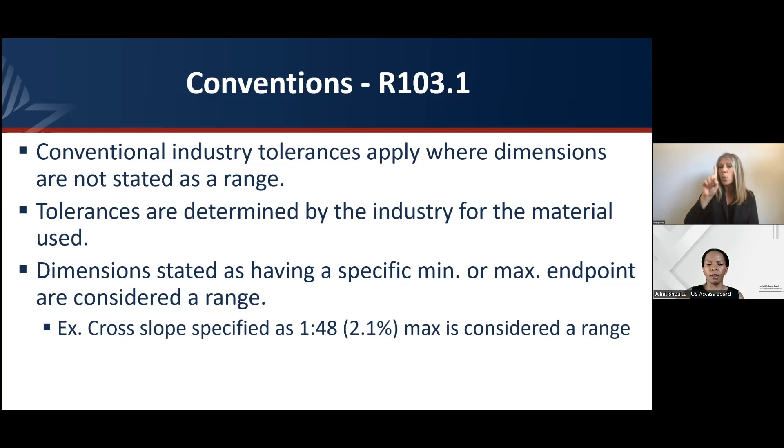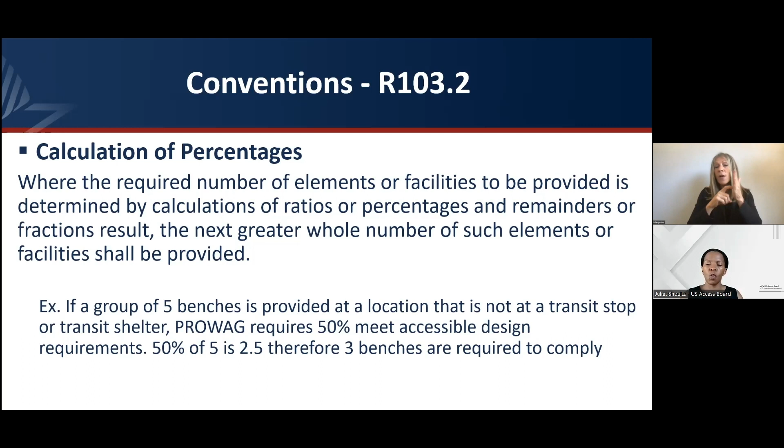Conventions provision R103.2, this sub-provision for the calculation of percentages, was revised for clarity, but the basic requirement remains the same. So where the required number of elements or facilities to be provided is determined by calculations of ratios or percentages, and remainders or fractions result, the next greater whole number of such elements or facilities must be provided. So for example, if a group of 5 benches is provided at a location that is not at a transit stop or transit shelter, PROWAG requires 50% of those benches to meet accessible design requirements. 50% of 5 is 2.5, therefore 3 benches are required to comply.

The sub-provision for the units of measurement has been edited slightly to clarify that ratios and percentages may not be exact equivalents, and each must be used independently of the other. Measurements are still stated in US customary units and metric units, and the values in each system must be used independently of each other.

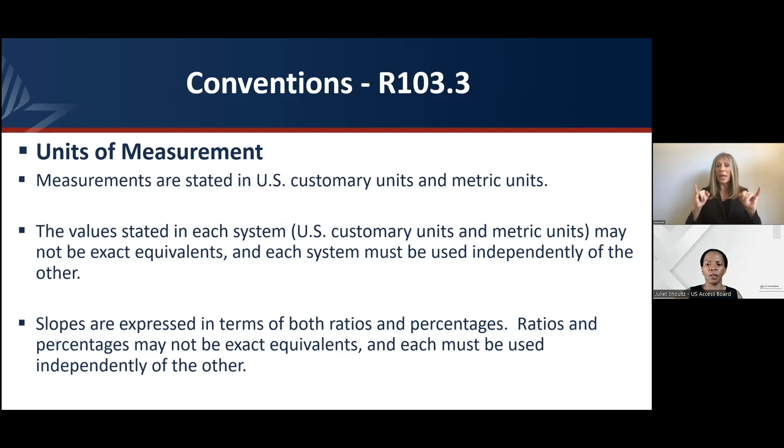Because the rule no longer incorporates the MUTCD by reference, the relevant terms in MUTCD have been added to the rule text. Several other defined terms have been added for clarity in light of revisions to the rule.

Before we go into the list of definitions, I want to highlight a few definition edits for those familiar with the proposed rule. We removed vertical surface discontinuities, and it is now addressed as changes in level. That is consistent with ADAAG. We added a definition for block perimeter to clarify on-street parking requirements. We also added a definition for boarding platform to distinguish between transit stops that must have detectable warning surfaces from those that do not have to have detectable warning surfaces. In the final rule, we have also added a definition for crosswalk, which replaces the phrase pedestrian street crossing that was used in the proposed rule.

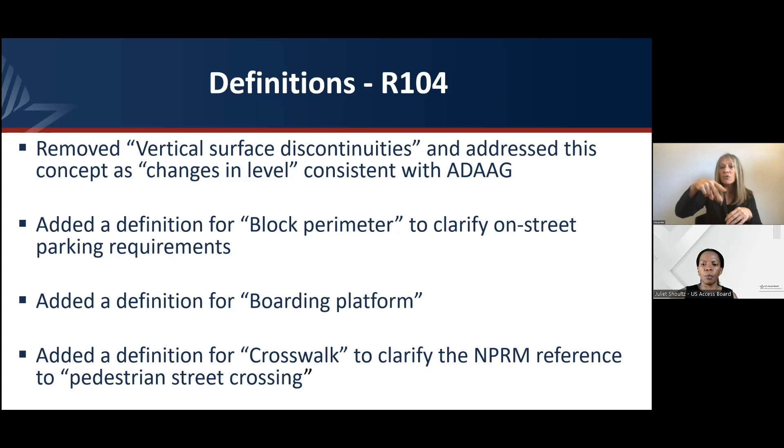On this slide, the new definitions are accessible pedestrian signal and boarding platform. Accessible pedestrian signal is a definition from the MUTCD. The definitions for accessible, alteration, and blended transition were revised for clarity. In editing the definition for alteration, the board wanted to emphasize the distinction between alterations and new construction. We added an accompanying definition for the term developed.

So an alteration is a change to or an addition to a pedestrian facility in an existing developed public right-of-way that affects or could affect pedestrian access, circulation, or usability.

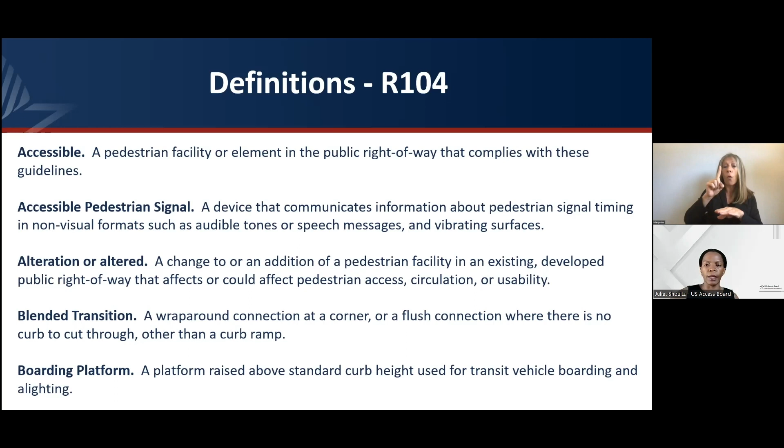Boarding platform is a term that was added to help clarify which transit vehicle boarding and alighting areas must have detectable warning surfaces. So boarding platform is a platform raised above standard curb height used for transit vehicle boarding and alighting. Standard curb height is specific to each jurisdiction.

Based on numerous technical assistance inquiries, the board decided to add a definition for block perimeter, which is also illustrated on this slide. So a block perimeter definition is the near side of the streets surrounding a block. For example, on a square block bounded by Main Street to the south, Pine Street to the north, First Street to the east, and Second Street to the west, the block perimeter includes the north side of Main Street, the south side of Pine Street, the west side of First Street, and the east side of Second Street.

This definition of block perimeter is used in the scoping of accessible on-street parking, specifically in the public right-of-way.

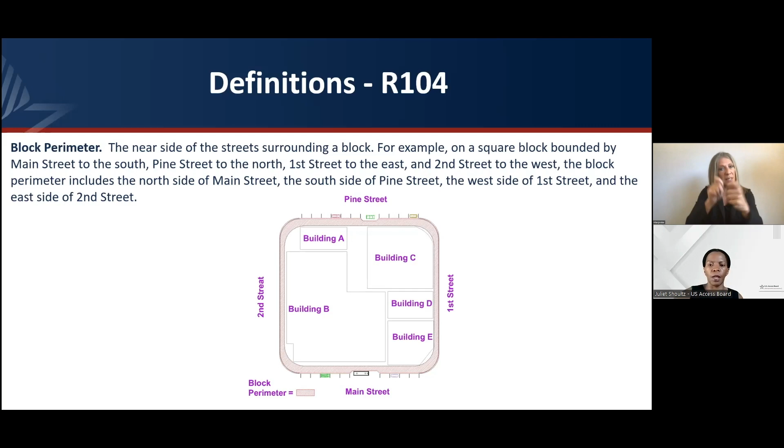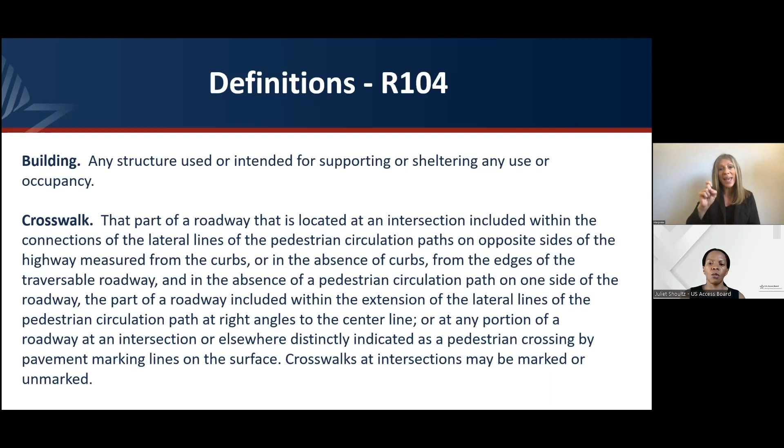The definition of crosswalk was added from the MUTCD with minimal edits for clarity. Commenters suggested and the board concurred that where applicable, PROWAG rule text language should align with established industry terminology. The word crosswalk, as I mentioned earlier, is used in the final text where the proposed text used the phrase pedestrian street crossing.

A frequently asked technical assistance question that we sought to resolve with the definition of curb ramp is the distinction between a curb ramp and a ramp. Curb ramps are a distinct feature with specific technical requirements, and ramps are a distinct feature with specific technical requirements. The curb ramp technical requirements can be found in Chapter 3, whereas ramp technical requirements are in Chapter 4.

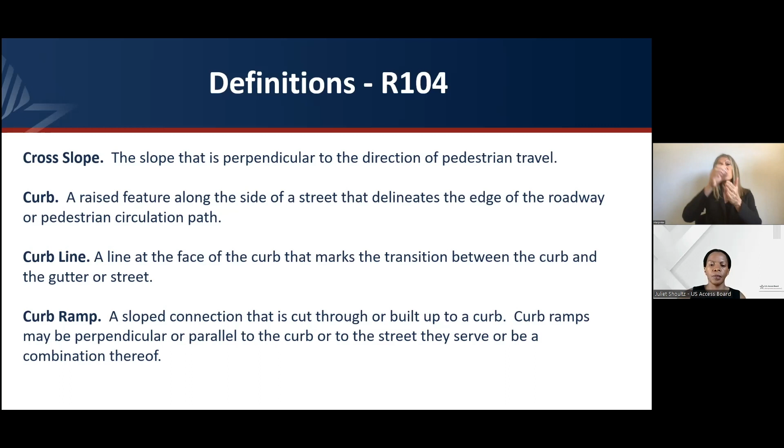Detectable warning surfaces are a standardized surface with specific technical requirements to warn pedestrians of hazardous areas. The definition of detectable warning surfaces was added in alignment with it being defined in the ADA and ABA accessibility guidelines. The word developed, as I mentioned earlier, is an added definition that serves the purpose in the final rule of distinguishing areas of new construction versus alterations.

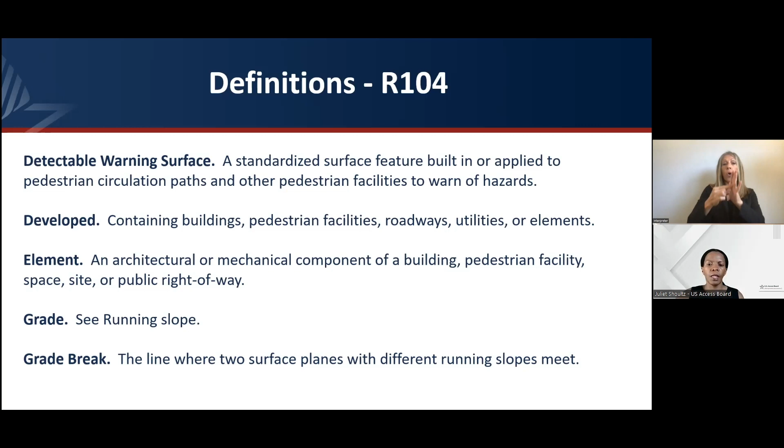The term grade is synonymous with running slope. And lastly, the term grade break was previously defined in the proposed rule and now edited slightly for clarity.

The terms highway and median were derived from the MUTCD with minor edits for clarity as applicable to PROWAG. Operable part was previously defined in the proposed rule and edited for clarity in the final rule.

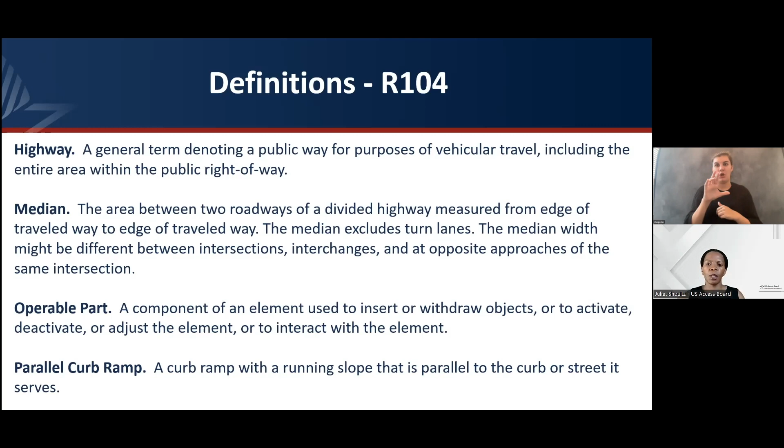The terms parallel curb ramp as well as perpendicular curb ramp, which you'll see in a couple of slides, were both added for clarity. In the proposed text, the meaning of these terms was implied through technical specifications. Inquiries we received in technical assistance indicated that the structure of defining by technical specifications was confusing. So for clarity, we have explicitly defined both parallel curb ramp and perpendicular curb ramp in the final rule.

The definition for passenger loading zone was added to qualify in the rule text which passenger loading areas are covered by these guidelines. So a passenger loading zone is an area that is specifically designed or designated for loading and unloading passengers, but does not primarily serve vehicles on a fixed or scheduled route.

The definition for pedestrian was derived from MUTCD with minor edits for clarity as it applies to PROWAG. The definition for pedestrian access route was edited to add the word accessible for clarity. So pedestrian access route is now defined as an accessible, continuous, and unobstructed path of travel for use by pedestrians with disabilities within a pedestrian circulation path.

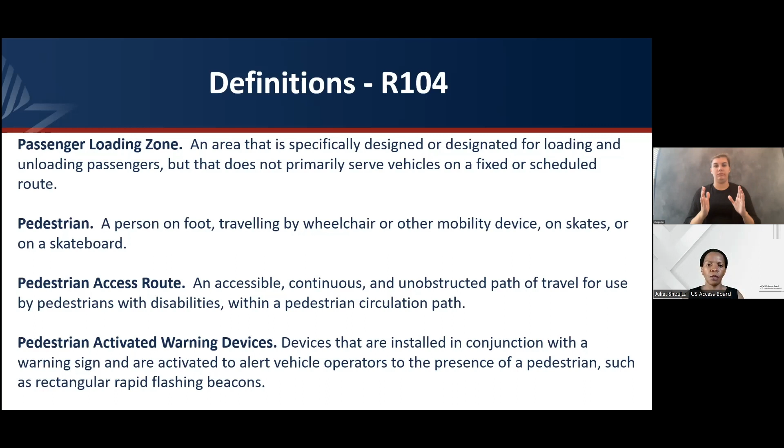Pedestrian activated warning devices is a new phrase defined in the final rule text. These are devices that are installed in conjunction with the warning sign and are activated to alert vehicle operators to the presence of a pedestrian, such as rectangular rapid flashing beacons.

Pedestrian change interval and pedestrian hybrid beacon are both terms from the MUTCD. It was necessary, like mentioned before, that these terms and others in the final rule text are added because we have included pertinent requirements from MUTCD directly into the rule text.

Pedestrian circulation path was previously defined in the proposed text and now edited slightly for clarity. Pedestrian facility is a new term, and it denotes a structure, route, or space for pedestrian circulation or use located in the public right-of-way.

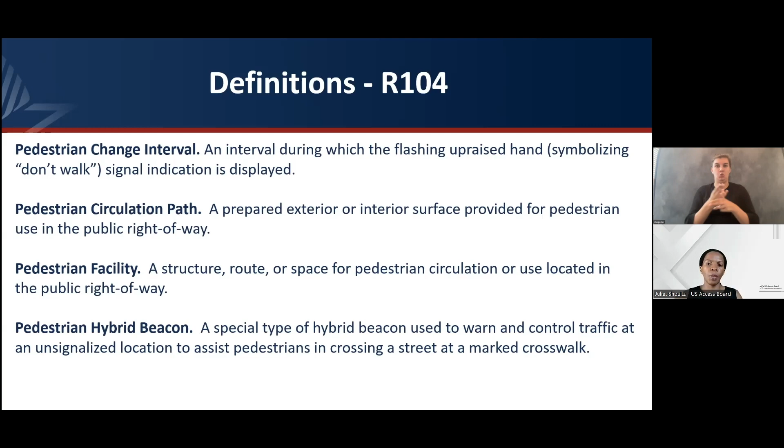Pedestrian refuge island is a new term that helps in clarifying the size of pedestrian refuge area where detectable warning surfaces are required. So a pedestrian refuge island is a defined area 72 inches long minimum in the direction of pedestrian travel, located between traffic lanes for pedestrian refuge within a median, splitter island, or channelizing island.

Pedestrian signal head is a term from the MUTCD. As mentioned with parallel curb ramps, the definition for perpendicular curb ramps was added for clarity. Public right-of-way was previously defined in the proposed rule, and the definition has been retained without edits.

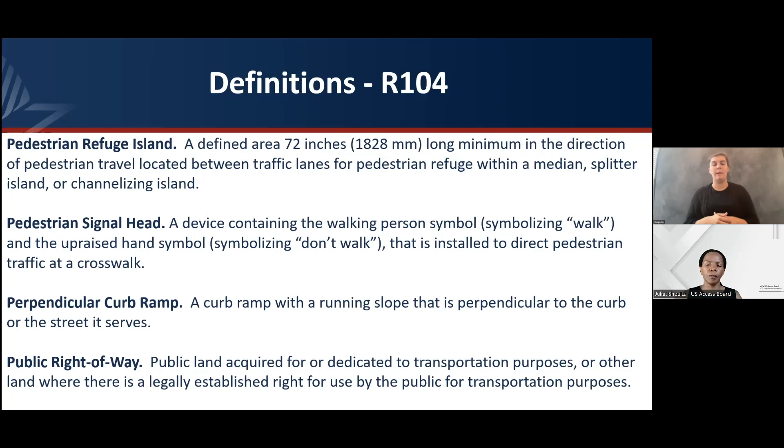Both push button and push button locator tone are definitions from MUTCD that have been incorporated in the final rule text to support the MUTCD requirements that are now also explicitly stated in the final rule. Qualified historic building or facility was previously defined in the proposed text and slightly edited in final rule to align with the way it's defined in ADAAG.

In the proposed rule text, we did not define ramp. Based on technical assistance inquiries, the Access Board decided to add a definition for ramp to mitigate some of the confusion between a ramp and a curb ramp. As you can see, the last sentence in the definition of ramp states a curb ramp is not a ramp.

The definition of roadway comes from MUTCD with modification for PROWAG. The definition of roundabout also comes from MUTCD. Running slope was previously defined in the proposed rule and edited in the final rule for consistency with the changes in the final rule.

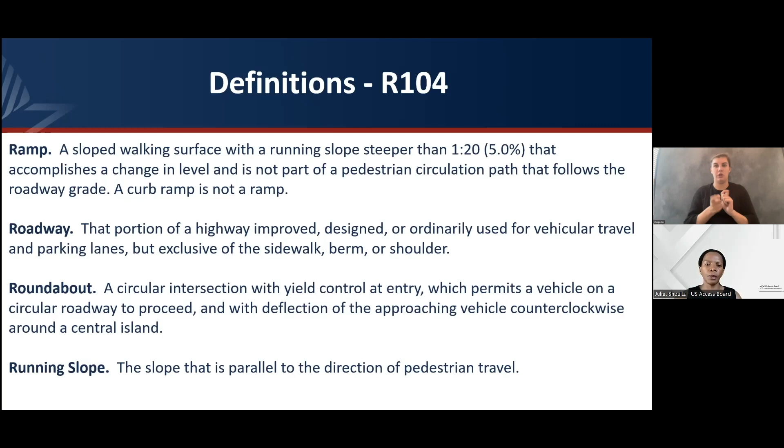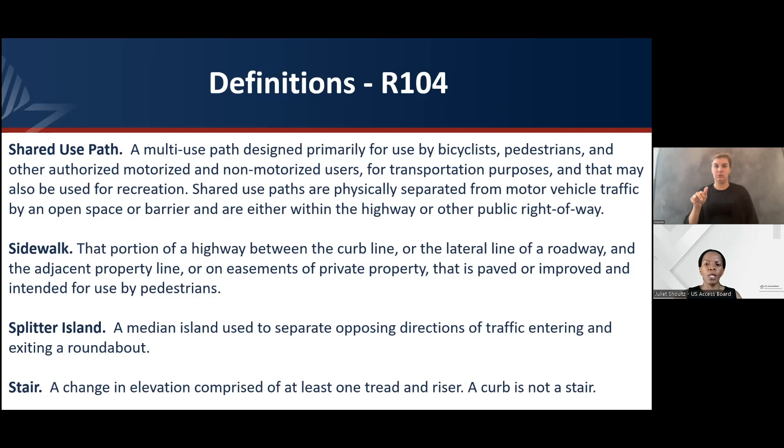Shared use path was previously defined. It has been edited to account for authorized users other than bicyclists and pedestrians. The definition for sidewalk and splitter island both come from MUTCD. We added a definition for stair, in part to make the distinction between a curb that might require a curb cut and stairs that may need to meet applicable accessible design requirements.

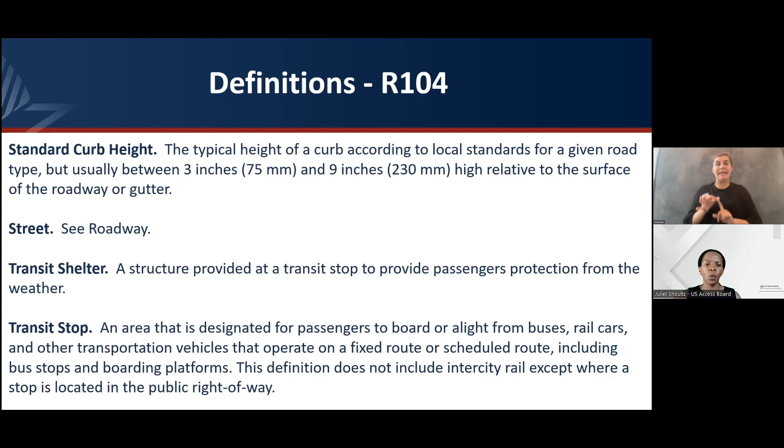We added a definition for standard curb height to clarify the requirement for detectable warning surfaces at boarding platform. We also added a definition for transit shelter and a definition for transit stop to clarify which transportation facilities are covered by PROWAG. You will notice that in the last sentence in the definition for transit stop, it clarifies that this definition does not include intercity rail except where a stop is located in the public right-of-way.

In the proposed rule, transitional segments was a provision. In the final rule, we defined transitional segments and use that terminology in different parts of the rule text. The concept of transitional segment has not changed. The definitions of traveled way and walk interval are from the MUTCD. We added a definition for vibrotactile to clarify requirements for accessible pedestrian push-button features.

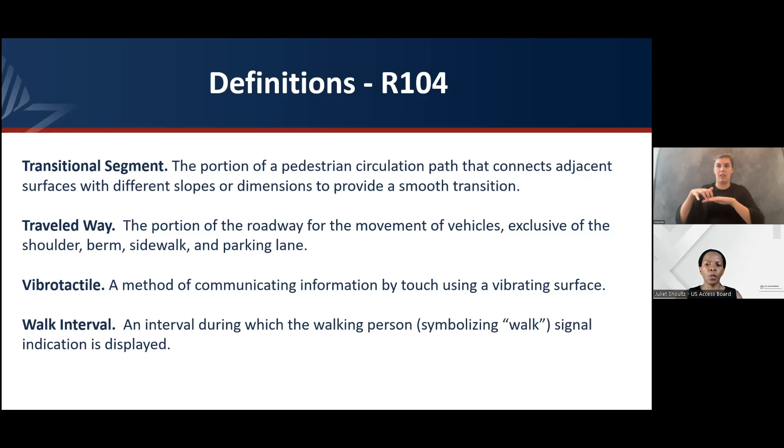This concludes the first training module of the finalized public right-of-way accessibility guidelines.